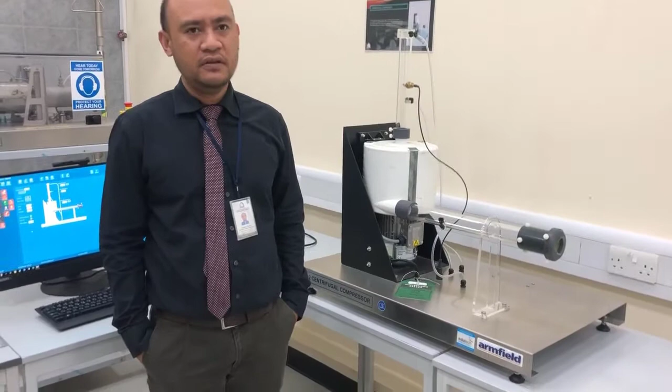Good morning everyone. Today we will be doing experiments on the centrifugal compressor, specifically the constant speed characteristic of a centrifugal compressor.

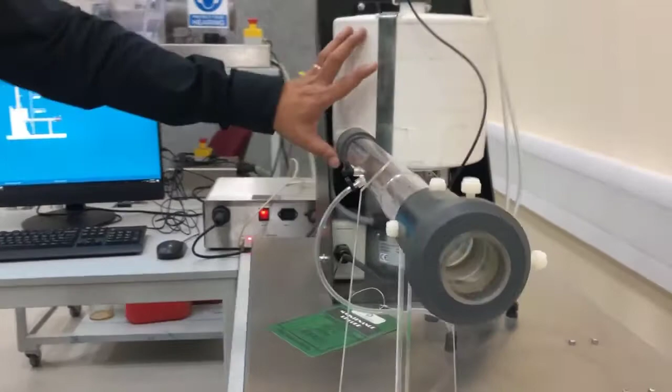So we'll be using this equipment. We have this 7-stage centrifugal compressor, with the inlet and outlet here. We have one orifice at the inlet, a temperature sensor, and the outlet aperture of the compressor. We can use this string to control the exit, or the outlet, of our compressor. This centrifugal compressor is interfacing with our software here.

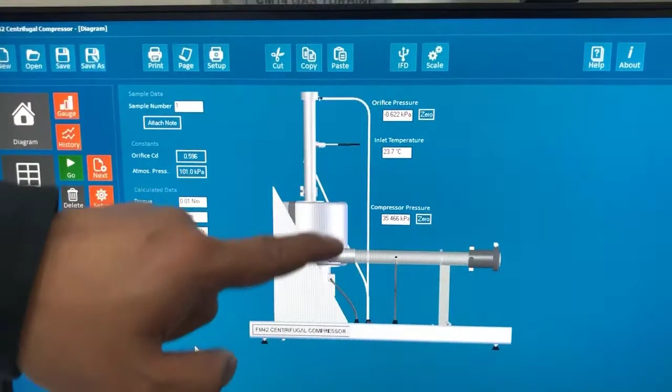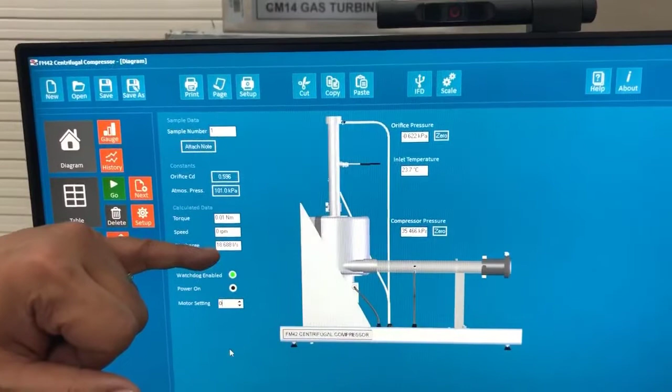This software can control the compressor as well as take the readings or data provided by our equipment. As you can see here, you have the diagram where you can get the orifice pressure at the inlet, the inlet temperature, and the compressor pressure inside the compressor, which is 7-stage. Then you have the torque, the speed, and the discharge in liters per second. So everything will be given by this software.

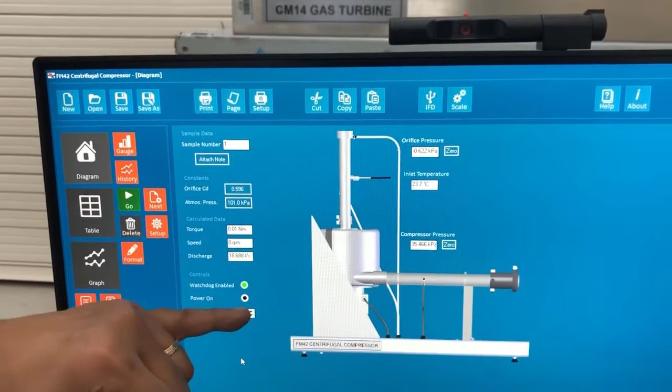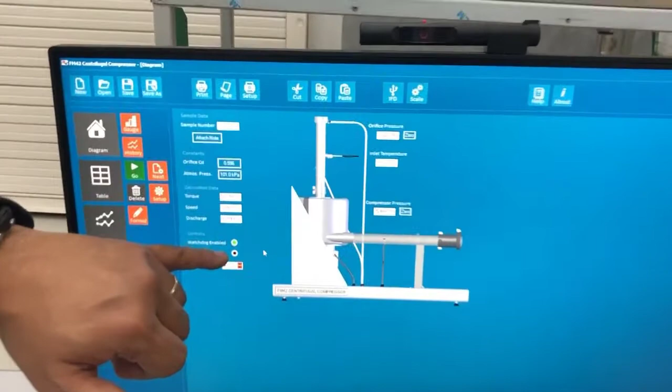So also the control. First, you will see here 'watchdog enabled' is green, power on. So in switching on the compressor, you need to press this one. Once it is on, the black dot means the power is on. Our equipment is now in the on position.

Now the motor setting, this will set the speed of our compressor. So let's try at 100% running.

So our aperture is fully open.

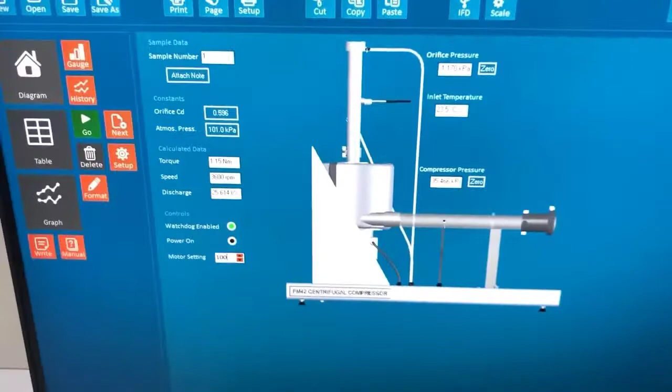Now on the software, you have here the green button where you can take your reading. By pressing this as 'go', you can take your reading here on the software.

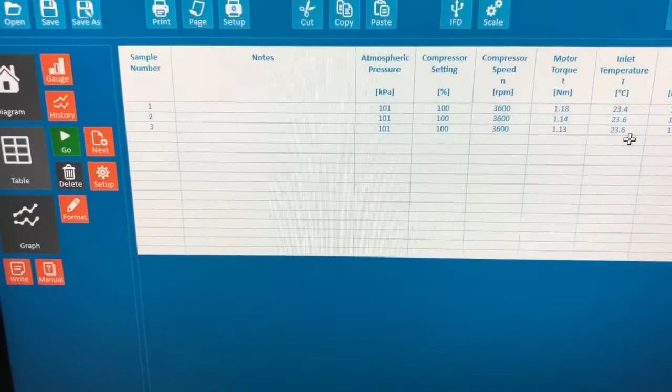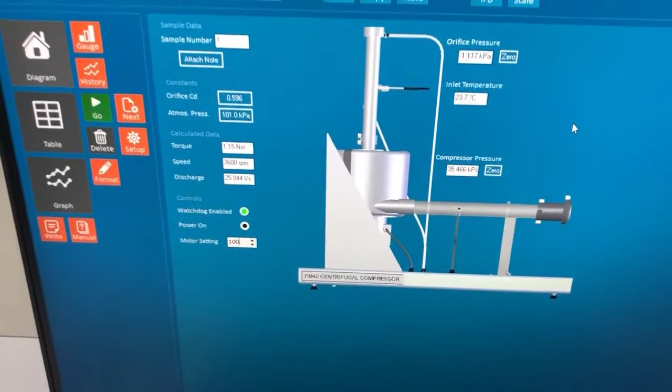So let's start taking the actual reading of the experiment. First, set the compressor speed to a maximum of 100%. We are now at 100%, but we will not record the flow rate yet. Next, fully close the outlet aperture to give a minimum flow.

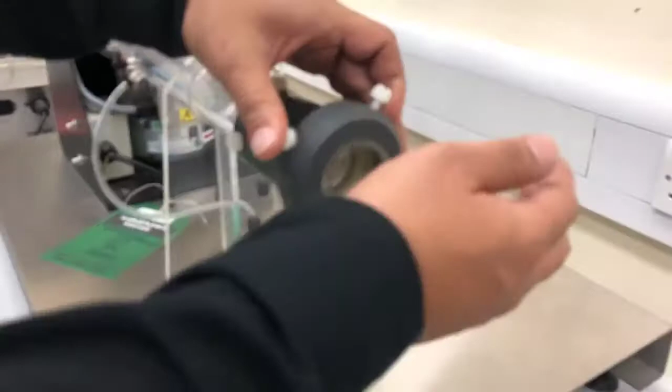So where is the aperture? This one. So we will fully close it. Once it is fully closed, it will give us a minimum flow.

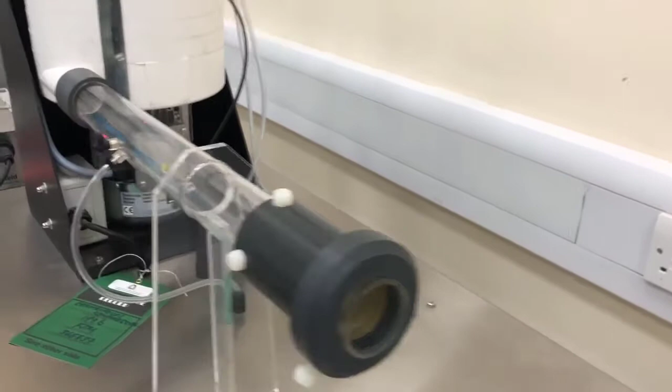Now click the button on the toolbar to record the sets of readings. So sets of readings: 1, 2, 3, 4, 5 sets.

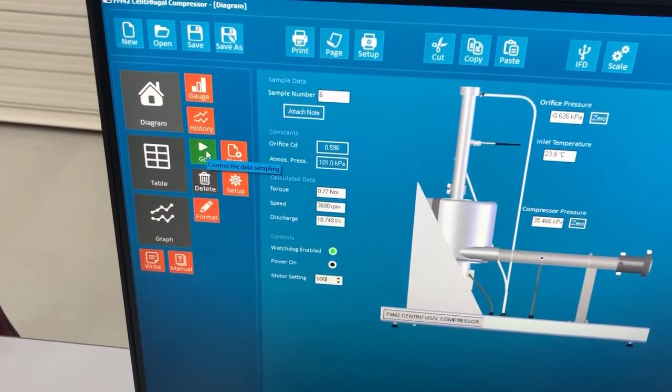Now we will select incremental values for air velocity that will give us 10 to 15 individual readings, for a maximum velocity.

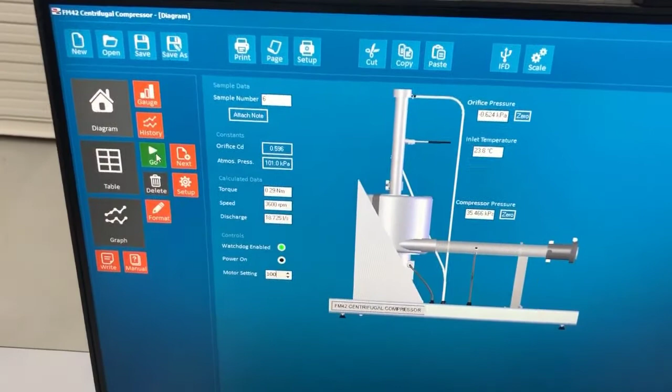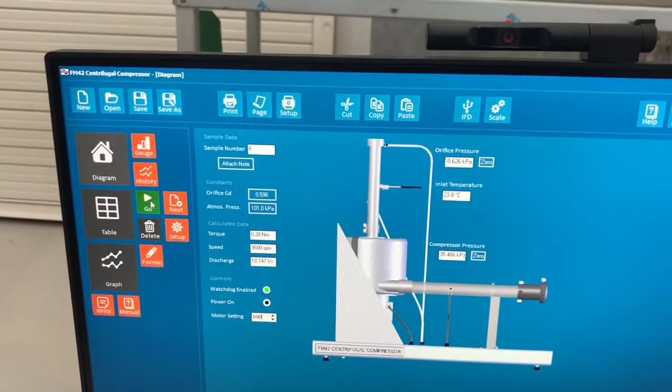Now, open the aperture to increase the flow rate for the first increment. Then click the go button to take the sample. Then repeat for each increment until the aperture is fully open. So let's go to the aperture and open it.

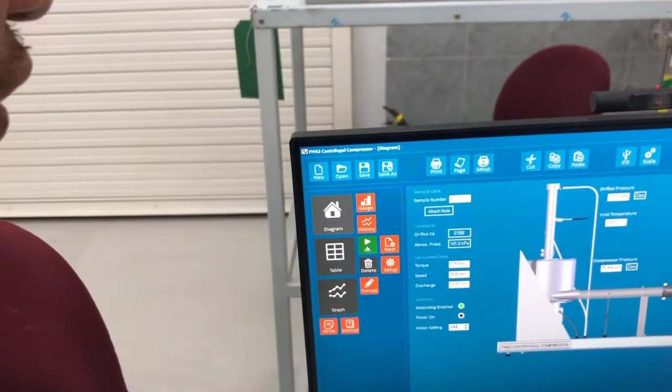So we open the aperture partially and take the sets of readings. Let's say 1, 2, 3, 4, 5. Then again, open the aperture.

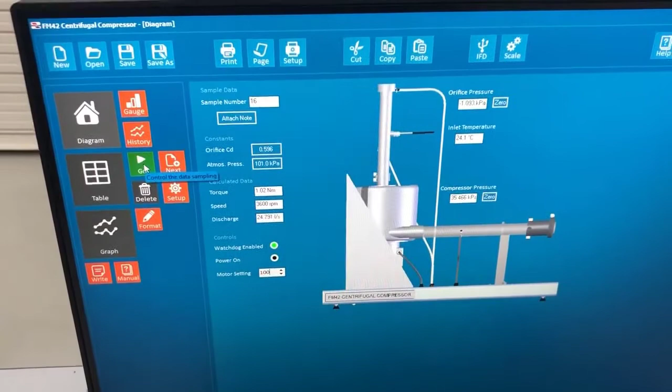Then again, open the aperture until it becomes fully open. Then take the reading.

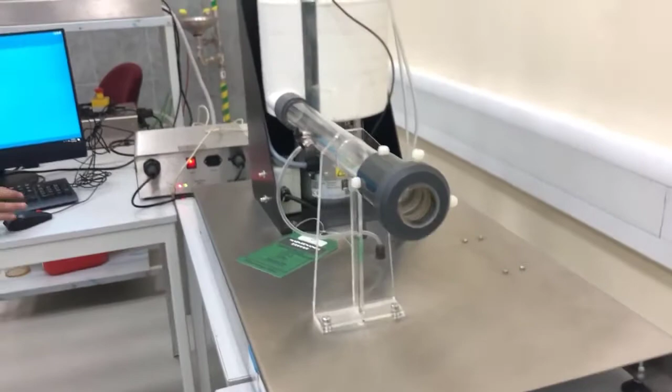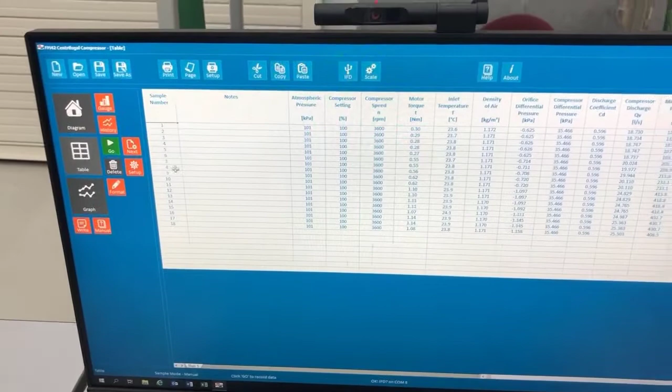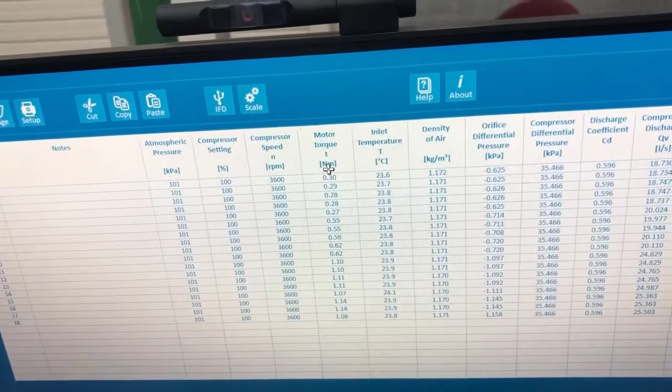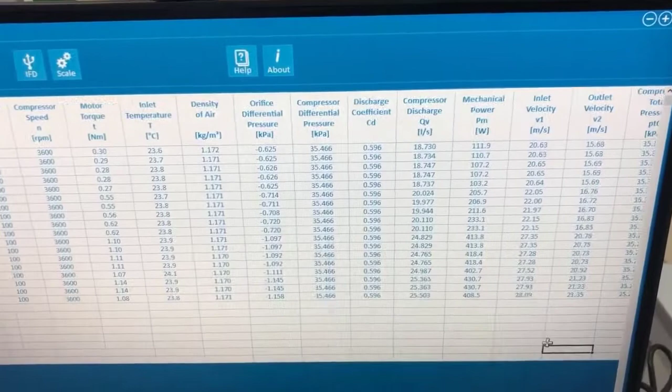So after completing the sample collection, you can take this table here. This is the sampling number, with the atmospheric pressure given, the compressor setting at 100%, compressor speed, motor torque calculated by the software, the inlet temperature, density, differential pressure, discharge, mechanical power, the inlet, and so on. So it will give you a complete reading.

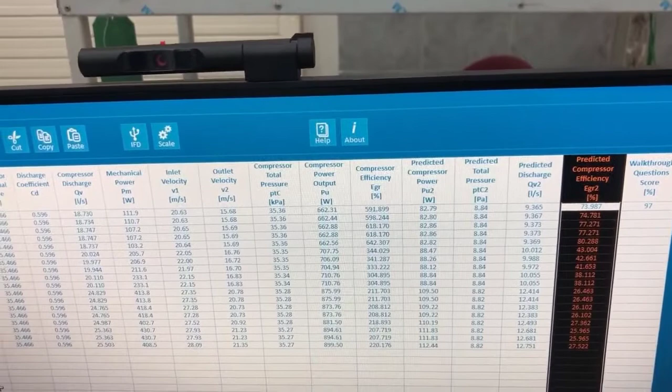Compressor efficiency, predicted compressor efficiency, and so on. Then save this one. We can save it as an Excel file.

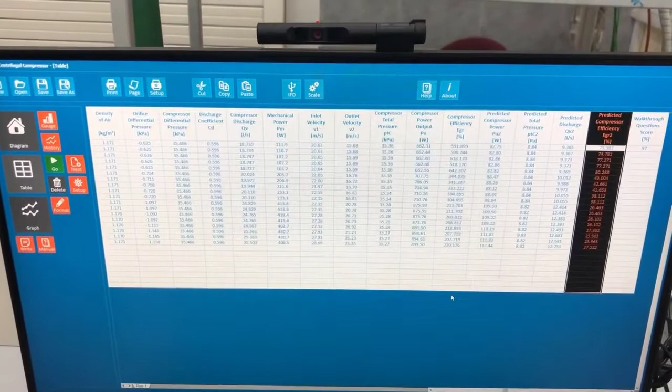And you can plot the graph according to what's given in the lab sheet or lab manual, such as compressor efficiency versus predicted compressor efficiency, or the discharge versus compressor efficiency. So just read the lab sheet or lab manual, it will guide you on how to plot the graph.

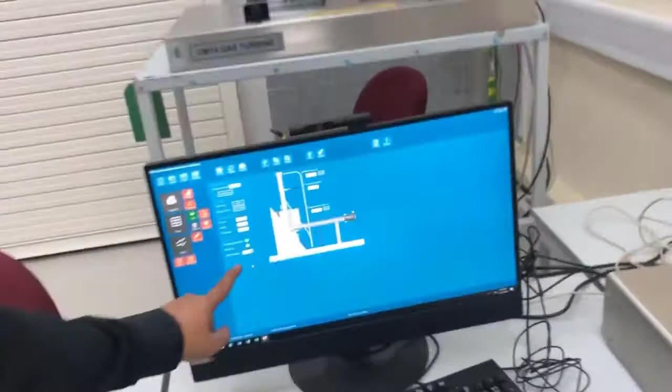So this is at constant speed. We can try it at 80% motor setting. So we tried it at 100%. You can try it at 80%, at 60%, and so on until 20%, 40%, if time permits. But the procedure is the same.